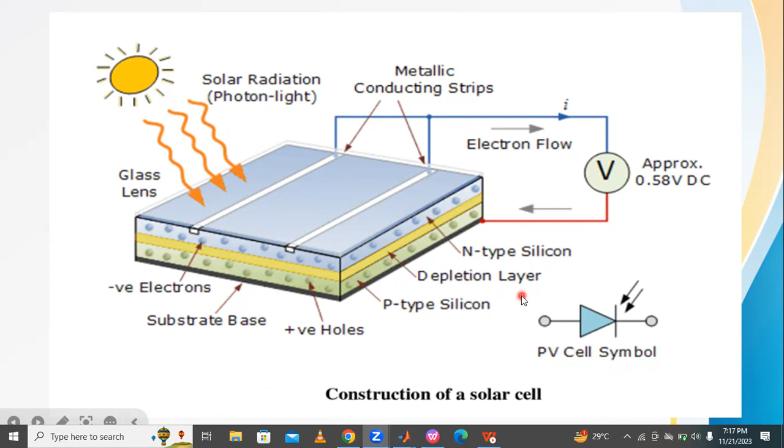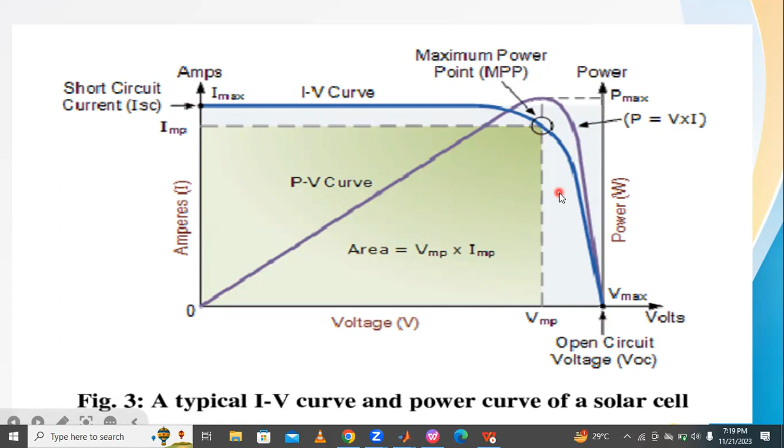Next, what are the parameters in solar PV cell? Meaning the parallel strings is 1. In this design of solar PV cell, I am choosing parallel strings as 1, and a series connected module per string is also 1. Only one parallel string and series connected module per string.

Corresponding to this parallel strings and series connected module per string being 1, these are the parameters: maximum power rating is 213.15, cell per module is 60, and open circuit voltage VOC is 36.3 volts.

Next, short circuit current ISC is called 7.8. Maximum value of current, short circuit current, is 7.84 amps. And maximum value of open circuit voltage is 36.3 volts.

Voltage at which the maximum power point occurs is 29 volts. At 29 volts, the maximum power point can be observed from the IV and PV characteristics of solar cell. Current at maximum power point is 7.35.

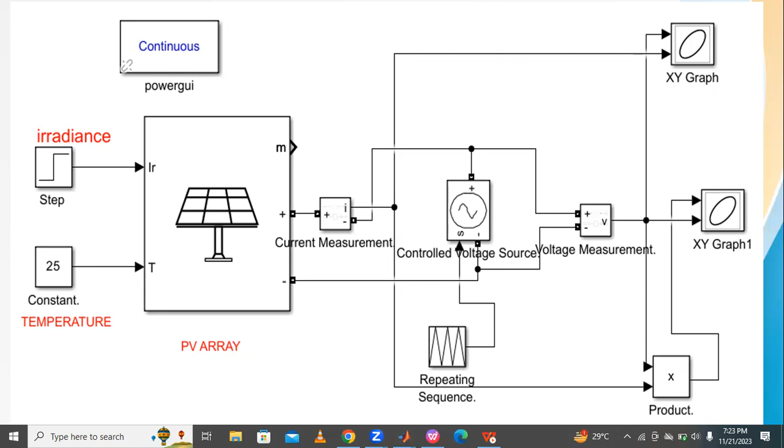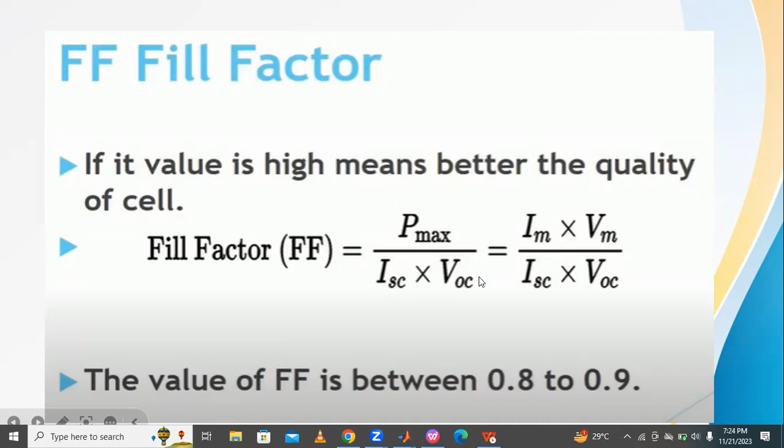The value of fill factor is typically between 0.8 to 0.9. Now for calculating efficiency using fill factor: efficiency is output electrical energy per second divided by incident light energy per second. This equals P maximum by P in, where P maximum equals Isc into Voc into FF. So fill factor is P maximum divided by Isc into Voc, meaning P maximum equals Isc into Voc into FF.

By substituting, the formula is Isc into Voc into FF divided by P in, the power input. Now let's take one example to understand how to calculate efficiency. For a solar cell having short circuit current of 350 amps per meter square, open circuit voltage of 0.6 volts, and fill factor of 0.8. The irradiance value for P input is 1000 watts per meter square, which comes from sunlight.

Efficiency is output per input, where output is Isc into Voc into FF divided by P input. Isc is 350, Voc is 0.6, FF is 0.8. By substituting these values with P in, we get efficiency of approximately 17%. This is the calculation of solar PV cell efficiency.

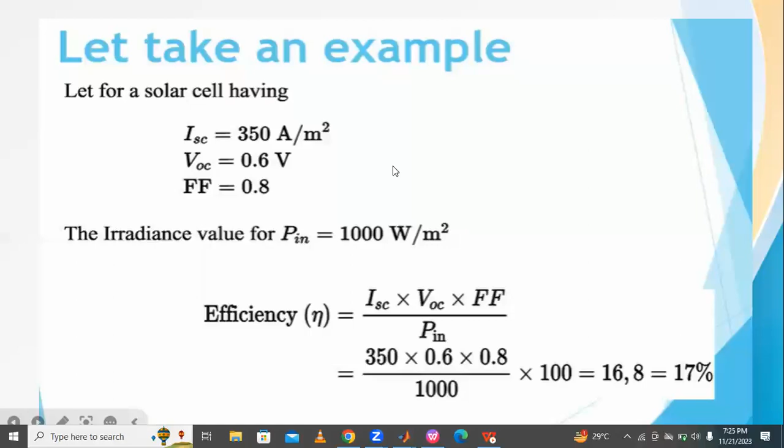Now let's go for the design of a solar PV cell using MATLAB. Open MATLAB, press Home and Simulink, press Simulink, then go to Create Model, press Create Model, and a new window will open like this.

From this library browser, we can take the elements. Search for PV array, press it, and this is called PV array. Add it to the untitled block model. So the PV array can be added like this - this is the solar PV array.

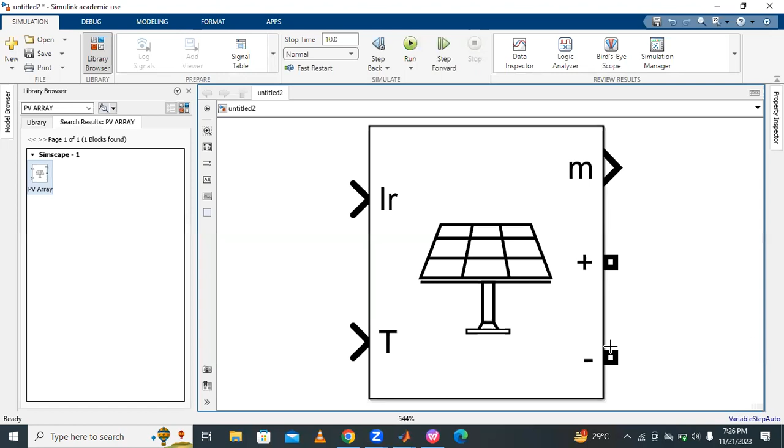IR is irradiance, T is temperature, and M is where we connect a measurement, used for measuring. From this we connect a bus selector, by which we can measure current and voltage like this. These are the positive and negative terminals of the solar PV cell.

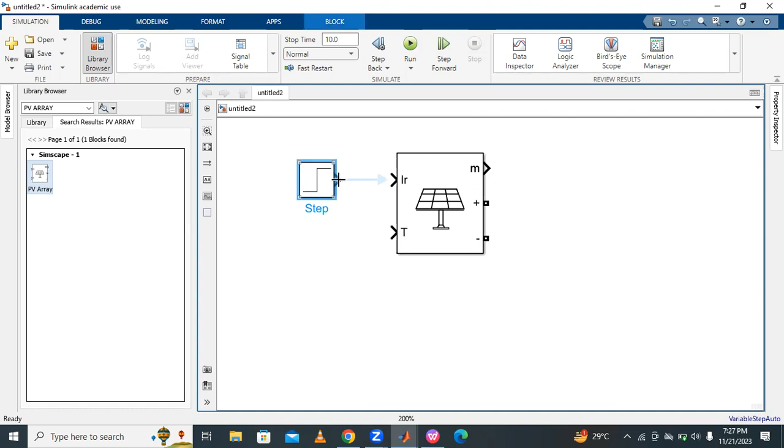So for this solar PV cell, first we connect the irradiance by taking one step input. Enter step here. The irradiance changes from 0 to 1000 watts per meter square, the maximum level of irradiance. That's why the initial value is 0.01 and the final value is 1000. Then apply.

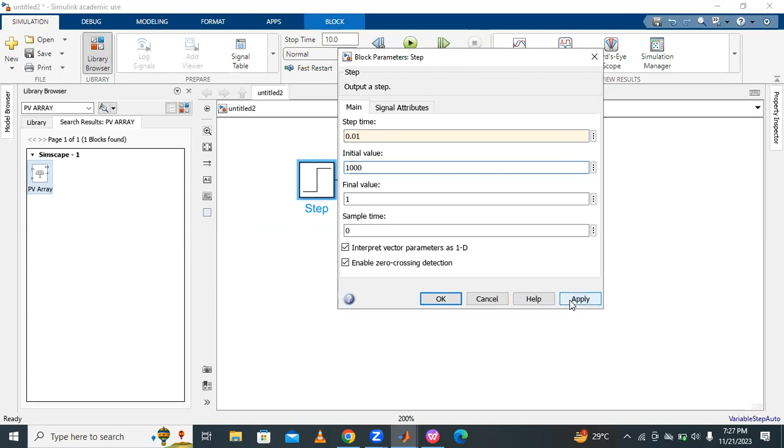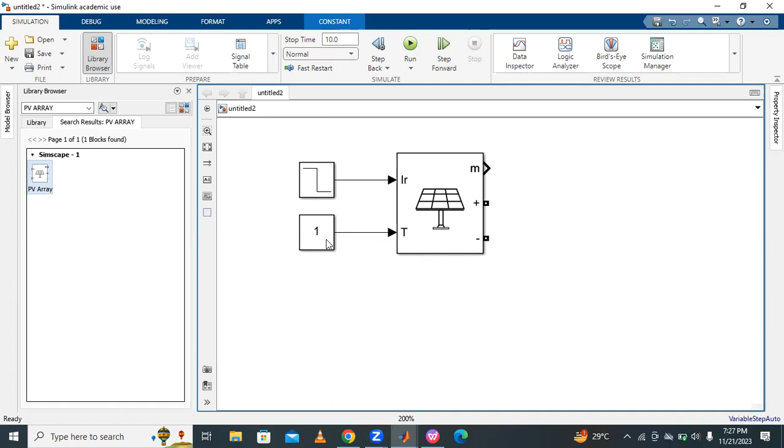This is called irradiance. The next element is temperature, so we take a constant block. The temperature for a solar PV cell, let us take approximately 25 degrees Celsius, like this. Apply. So this is irradiance, and this is temperature.

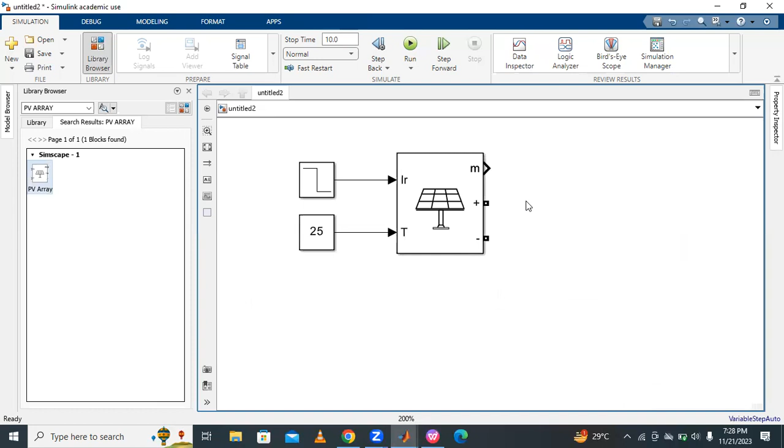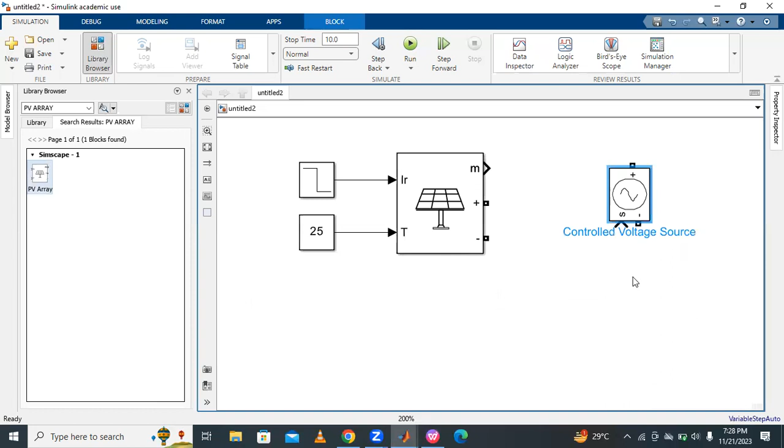Next, for current to voltage, according to the circuit diagram, current measurement and a controlled voltage source are required. So we place the controlled voltage source here, which has positive and negative terminals.

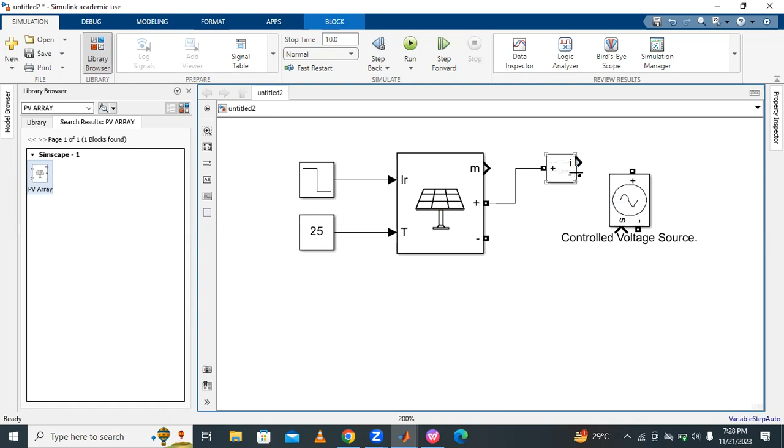In between these two terminals, we connect one current measurement. Connect positive to positive of the current measurement, and negative to negative, as per the circuit diagram. The positive terminal is connected here to the positive terminal of the controlled voltage source, and the negative terminal connects to the negative terminal of the solar PV array.

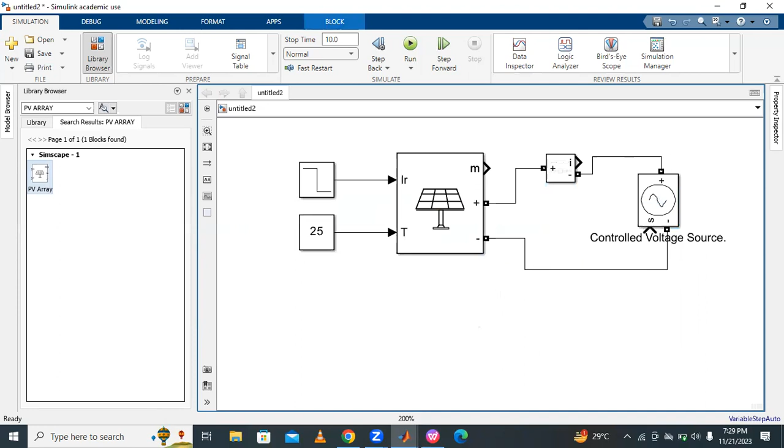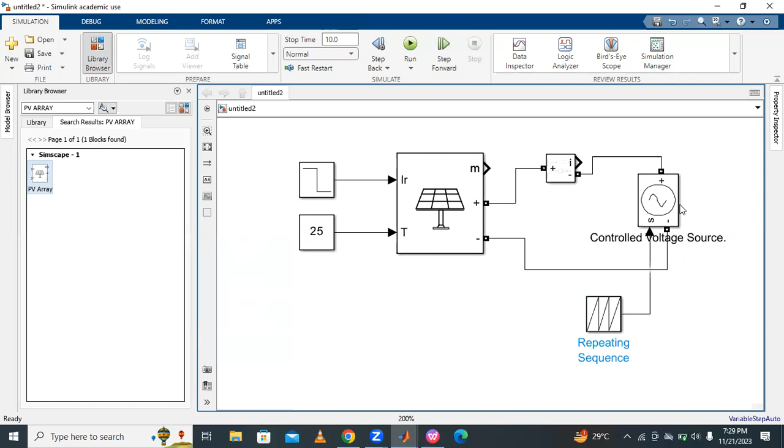Now take one repeating sequence block - search repeating sequence and place it, connecting it here. This repeating sequence is used to change and control the voltage of the voltage controlled voltage source.

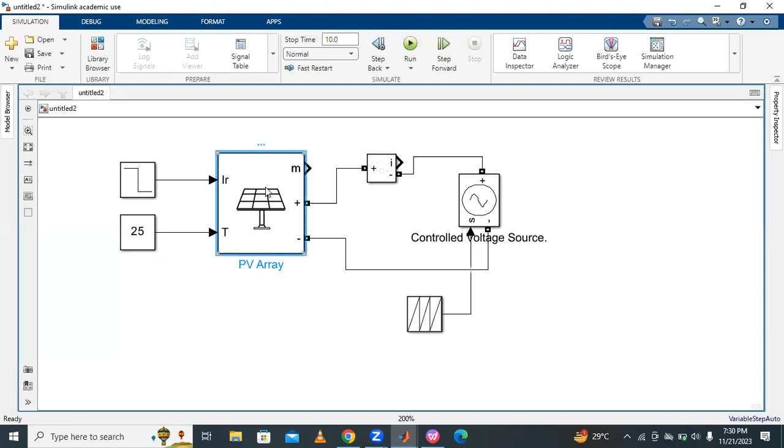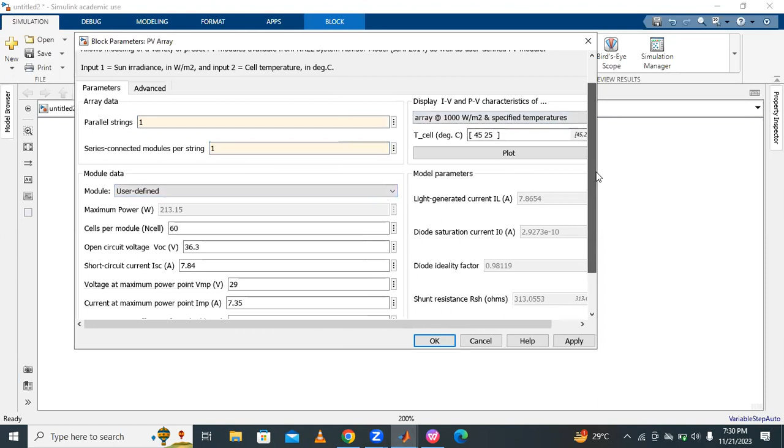Now, according to our circuit diagram requirements, we set the parameters. Parallel strings is 1 and series connected modules per string is 1. Open this solar PV array and change the settings: instead of 40, set parallel strings to 1 and series connected modules per string to 1.

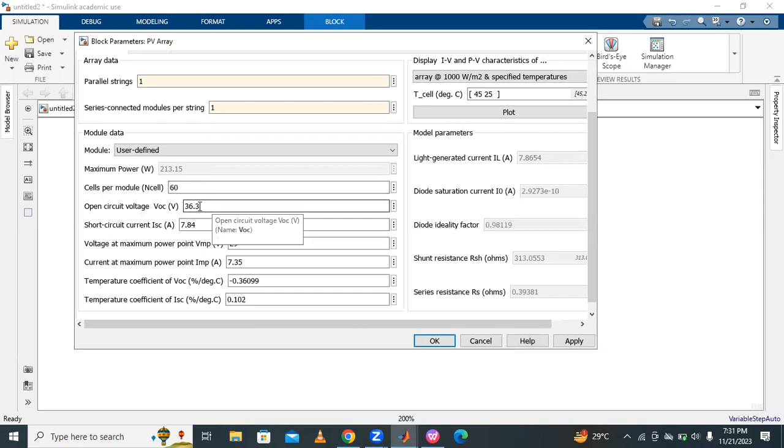These are the parameters: maximum power is 213.15, calculated by default. Cells per module is 60, and open circuit voltage is 36.3. This value of 36.3 we have to use in the repeating sequence as the maximum value. Short circuit current is 7.84. Remember, open circuit voltage is 36.3. Apply, then open the repeating sequence.

Enter the values 0, 1, 2 here. For these, the repeating sequence changes like this: it starts from 0, then increases to 36.3, stays at 36.3, and then returns to 0.

Like this, it changes—the repeating sequence changes. This voltage, the maximum voltage, is called 36.3.

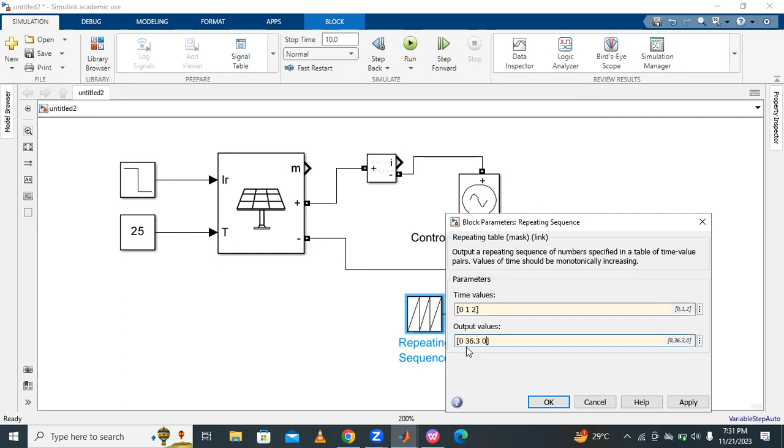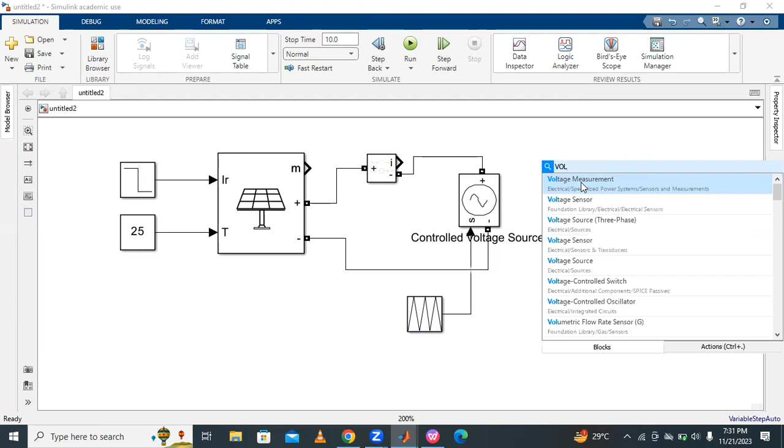Then the current measurement is done, and here we have to connect one XY graph to get IV characteristics. First, select one voltage measurement and connect it exactly parallel to the controlled voltage source, in this way, connect parallel.

So this is called, what is this? Voltage measurement, just like a voltmeter. And this is current measurement, current and IV characteristics. To get IV characteristics, voltage is on the x-axis, current is on the y-axis.

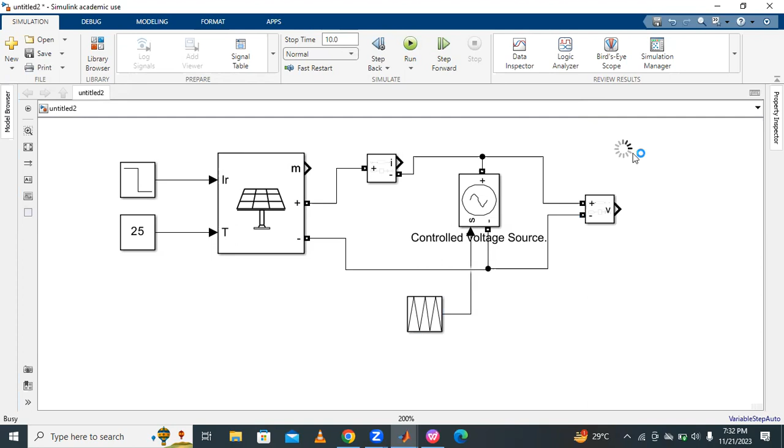So take one XY graph, right here, XY graph, Simulink graph, XY graph. Here, X-axis is called voltage, and y-axis is called current. Like this, this first graph is called IV characteristics.

Then similarly, for PV characteristics, first we have to multiply voltage and current. That's why we take a product block here. So take product—that means voltage and current.

Like this, connect. Here from voltage measurement we take voltage, and from current measurement, current, and then product—that is called power, equal to V into I. So power is on the y-axis.

This is called voltage on the x-axis, and current on the y-axis. Here also the x-axis is called voltage—common x-axis, but power changes. Power here is on the y-axis, current is on the y-axis there.

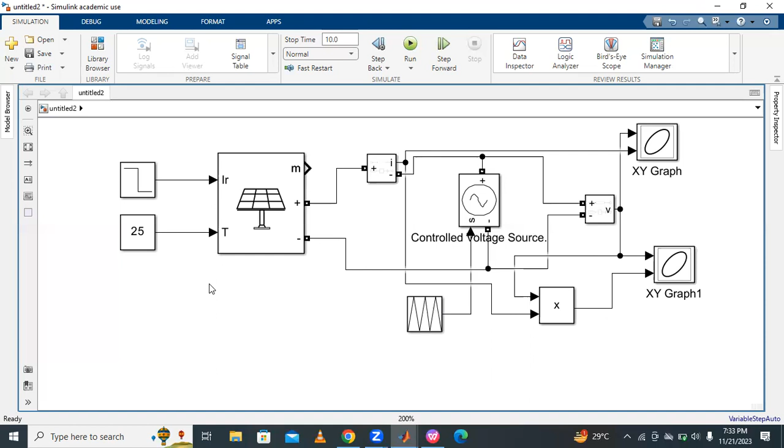So like this, this circuit solar PV model is designed, and then we simulate. Take one powergui block, place it here, and then simulate. It's compiling, it takes some time.

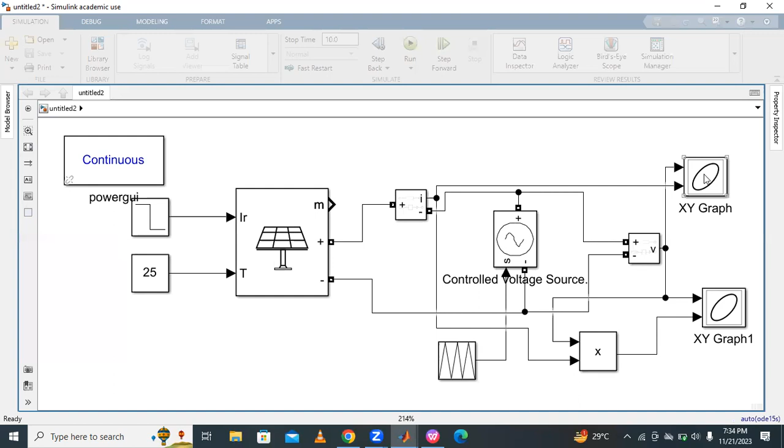After compiling, open the XY graph. Press here and we will get the XY graph—IV characteristics of the solar PV cell, without any modifications, directly adjusted. It will show current versus voltage characteristics.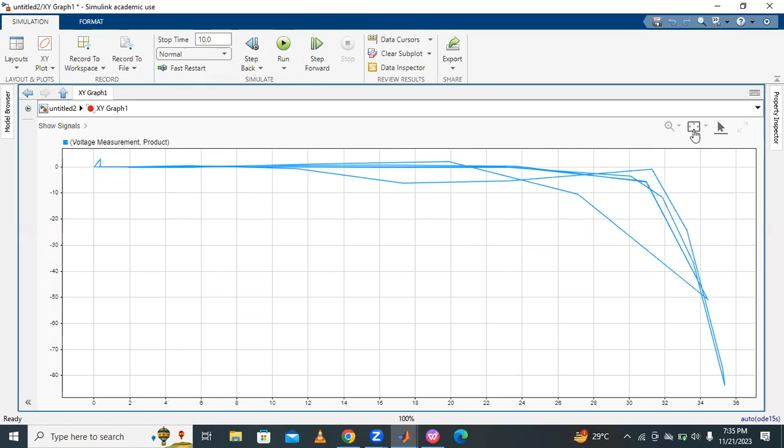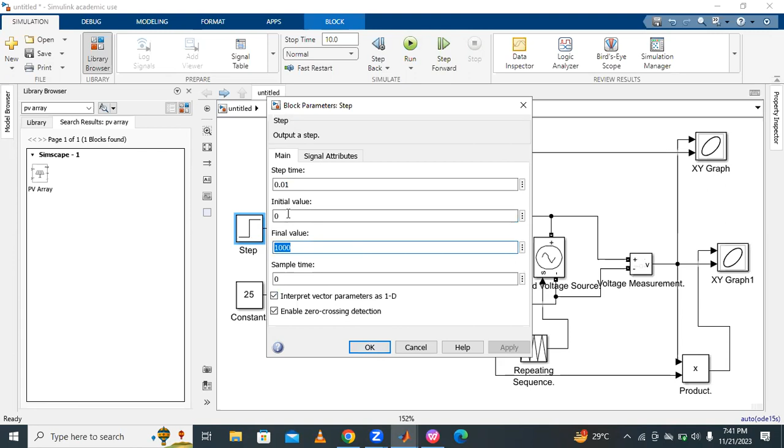Set step input to 0.01, with initial value 0. Step time is called 0.01, final value is called 1000. Initial value 0, final value 1000. Change it like this, and then simulate.

By simulating, across this XY graph we will get the IV characteristics, current versus voltage characteristics of the solar PV model. Like this, you can understand—short circuit current is called 8, open circuit voltage is called 36.3. So like this, we can understand the IV characteristics of the solar PV cell.

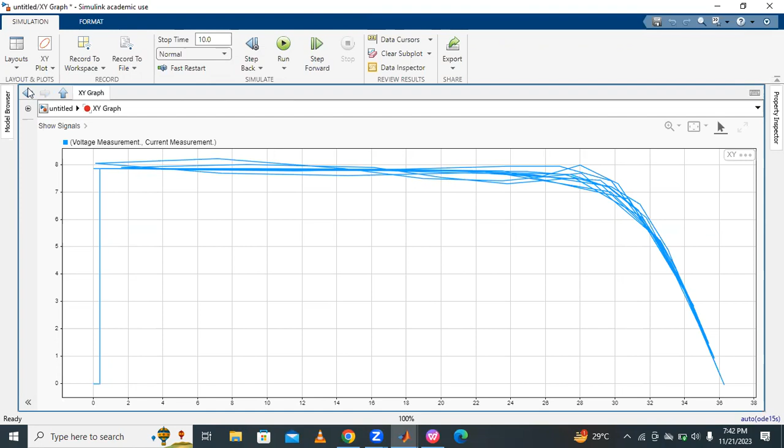Coming to the PV characteristics of the solar PV cell, open XY graph 1, PV characteristics of solar cell—power versus voltage characteristics. Like this, the power versus voltage characteristics of the solar cell changes like this. Maximum voltage is at 29 volts—maximum power tracking voltage, according to when the solar PV array cell model is open.

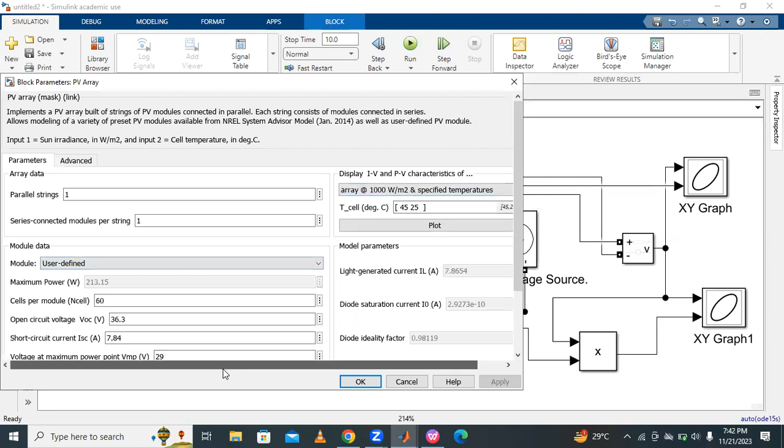What is the maximum power? At the maximum power point, it is called 29 volts, the current is called 7.35. At maximum power point, this is called maximum power, equal to 213 watts.

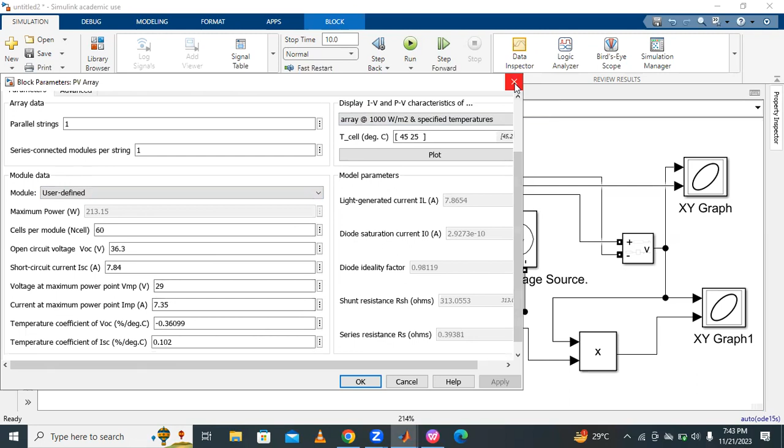Corresponding to 29 volts and 7.35, is the maximum power—you can identify that power using this figure. 213 here, 210, and then 213—this is the maximum power. What is the voltage? 29 volts. What is the current? It's nothing but 7. This is called power versus voltage characteristics.

Voltage is called 29 volts; corresponding to 29 volts, we get maximum power, that is called 213, 210 approximately—this is called the maximum power point track point. So this is called PV characteristics of the solar PV model.

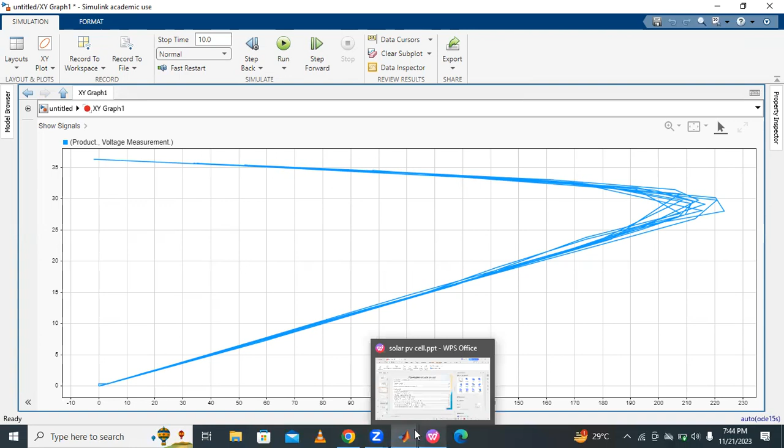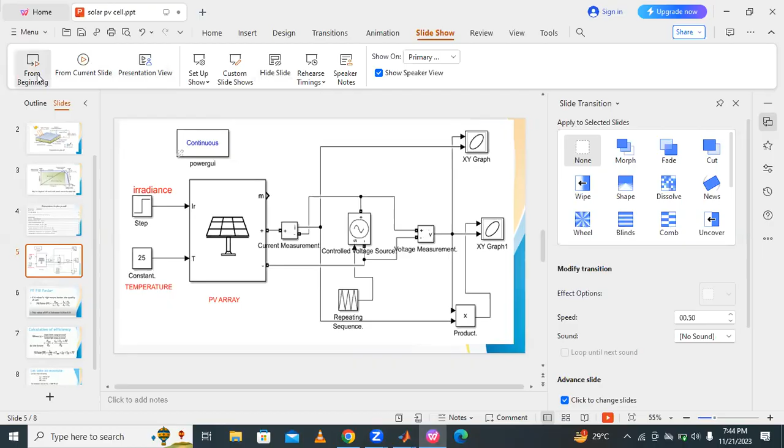Like this, by connecting the circuit as per the circuit diagram, we can understand the IV and PV characteristics of the solar cell. Understood? So this is the circuit diagram—in this way we have to connect the solar PV cell, solar PV array.

Step, that is called irradiance. Here IR is called irradiance, temperature, and measurement, connecting terminals, positive and negative. This is connected to the current measurement, controlled voltage source, voltage measurement, and repeating sequence, and the product of current and voltage—that is called power. Like this, we can connect the circuit. Okay, this is about a solar PV cell.